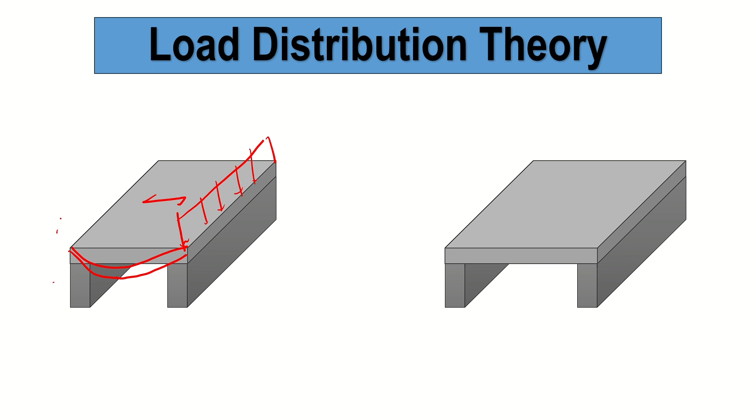So, how does the loading distribute from the slab towards the beam? Madali lang. Kapag one-way distribution, lahat ng loading mo mapupunta sa long span. Ibig sabihin, magkakaroon ka ng uniformly distributed load sa long span. So ano napupunta sa short span? Essentially, wala. Does it mean that we don't have any loading in the short span? It doesn't mean that we don't have. Kasi, all of the materials have self-weight. So may loading pa din yun, yung self-weight niya. But essentially, the superimposed load will be transferred to the long span beams.

Okay? So again this is for one-way slab or one-way distribution. How about for two-way slab? For two-way slab, ganito yung itsura niya usually sa framing plan. So kapag ganyan yung symbol, it transfers its loading to the long span as well as the short span. So magkakaroon ng loading yung both. So meron tayong trapezoidal loading sa long span, while in the short span, we will be having triangular loading. Ganun din sa kabila, hindi ko na isusulat kasi magulo.

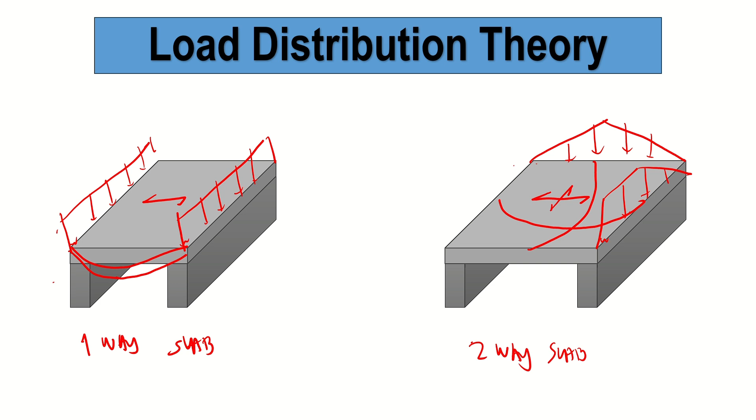So para mas malinaw on how do we determine one-way or two-way slab, ito yung scenario. For example, we have a framing system. This is a column, itong dark shaded, tapos yung mga naka-broken line, that is a girder, tapos that is a beam. So if L over S is greater than 2, that is one-way slab. Now, if L over S is less than or equal to 2, that is two-way slab. Ano nga ba yung L?

Ano nga ba yung S? So basically, L represents the long span of a slab panel. So ano ba yung slab panel na pinag-uusapan natin? Yung slab panel is the one that is bounded by a beam. So yun yung considered natin na slab panel.

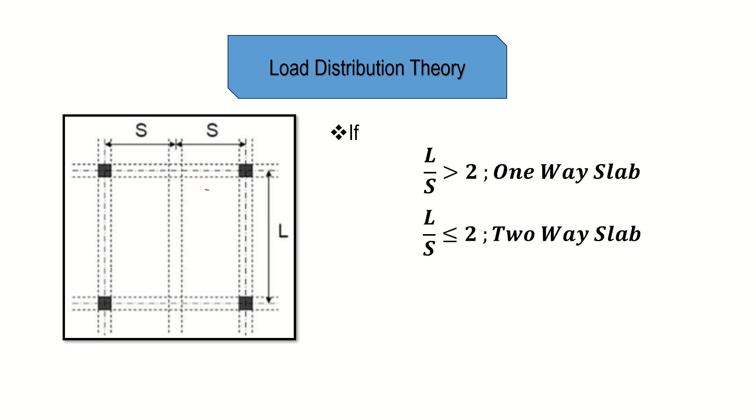So for example, here in our framing system, as you can see, syempre alam natin na yung slab sinusuportahan siya ng beams. So ngayon, ito ay considered as one slab panel kasi may beam ka sa gitna eh. O yan. Yan ay considered as one slab panel. If that is one slab panel, ang sabi natin yung L tsaka S natin naka-based sa slab panel. So therefore, our long span natin will be right here and short span natin will be right here.

So hindi po yun distance ng column to column. Some other students nalilito eh. Ang ginagawa nilang distance ng long span tsaka short span, column to column. That's not the case. Again, we will base our L over S, yung L natin tsaka S natin, based on the slab panel. So if this is the case, our slab panel is right here, the long, and then ito ay yung ating short span.

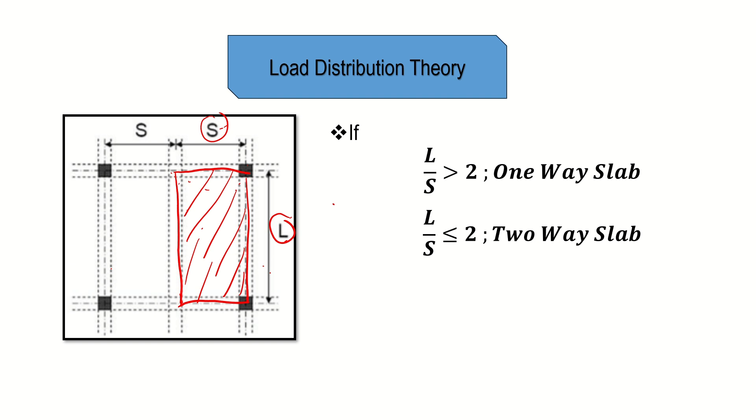Okay? Now, again, if L over S is greater than 2, that's one-way slab. Kapag less than or equal to 2, that's two-way slab. In some other books, pinagbabaliktad nila, parang S over L. Kapag S over L is less than 0.5, that's one-way slab. Kapag greater than 0.5, that's two-way slab. So, ganun lang. But for me, stick tayo dito. L over S greater than 2, one-way slab. L over S less than 2, two-way slab.

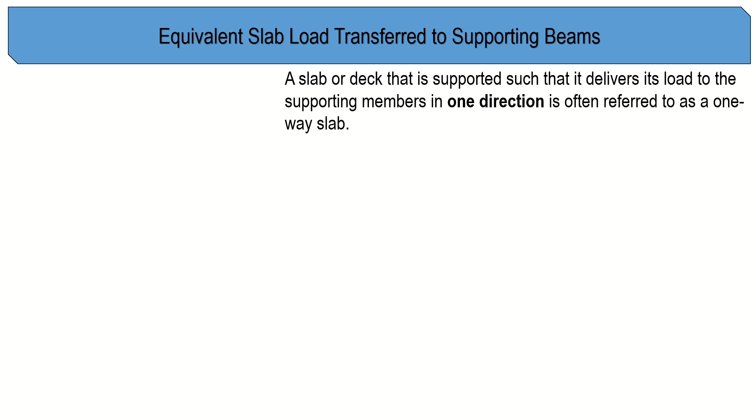O, ngayon, let's start with our proper lecture. So, ito yung equivalent slab load transferred to supporting beams. So, sabi dito, a deck or a slab that is supported such that it delivers its load to the supporting members in one direction is often referred to as one-way slab. Again, meron tayong ganitong symbol. Kapag nakakita kayo ng ganyang symbol, tina-transfer niya yung loading niya, all of the superimposed loading, to the beam kung saan nandun yung long span. So, ang ating long span dito is the beam CD. Ngayon, ang ating short span is beam AC.

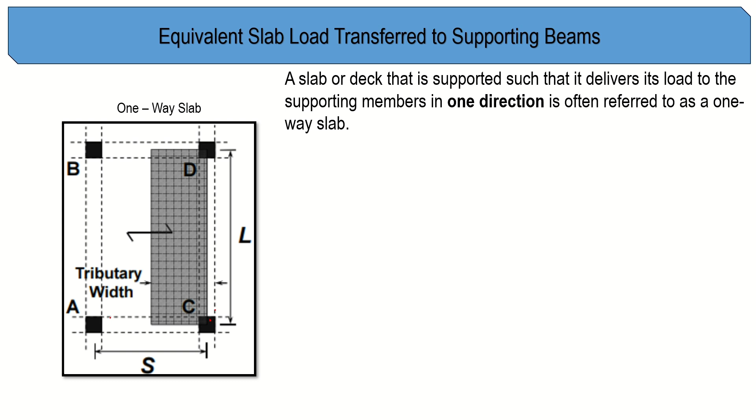But how do we distribute it? Kung nakita nyo kanina sa figure na dinrawing ko, siya ay uniformly distributed loading. When we say uniformly distributed load, rectangular loading po. Ayan, just like this one, what you can see in your screen. So ngayon, how do we determine the W? Ito, yung W na yan, yung magnitude ng loading nyo. Madali lang. So yung Q mo, coming from the code, yan yung mga loading sa NSCP or ASCE na naka-kPa. Just multiply it by the tributary width.

Ano ba yung tributary width? Tributary width is just half of the slab short span. Yung short span ng slab. So in our case, since edge slab panel to, ang tributary width lang natin is kalahati lang ng S. Kapag middle slab panel ito, dalawang kalahati, so magiging S. But in our case, that is S over 2. So again, Q coming from the code multiplied by tributary width. That is just how we get the W.

So how about in the beam along short span? So sabi natin, walang loading. But again, this is not true because all of the beams have self-weight in them. So hindi po yan magkakaroon ng no loading. This is just a representation for the loading considering superimposed loads. Hindi kasama yung self-weight when we say superimposed.

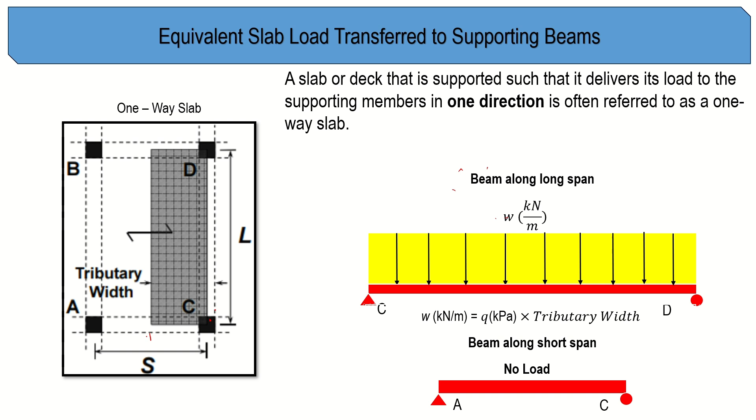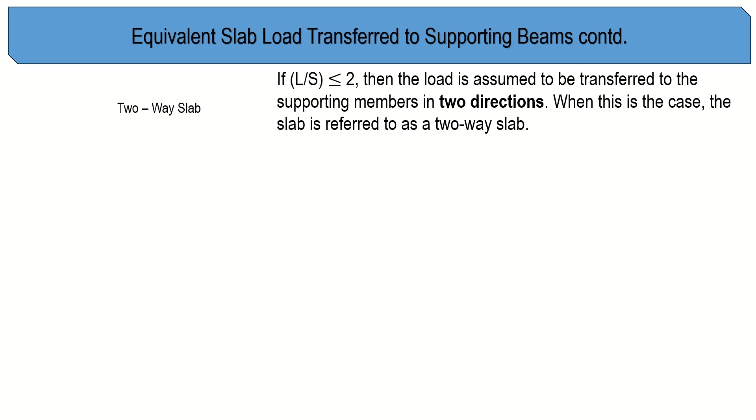Okay? So ngayon, paano naman kapag two-way slab? So if L over S is less than or equal to 2, then the load is assumed to be transferred to the supporting members in two directions. When this is the case, the slab is referred to as two-way slab. So ngayon, hindi na tayo rectangular. Magkakaroon na tayo ng trapezoidal tsaka triangular. Ganun pa din, how do you determine W? Yung W po pa din is Q coming from the code multiplied by tributary width. So ngayon, in our case, ganun pa din yung tributary width natin is just S over 2 kasi this is an edge span slab.

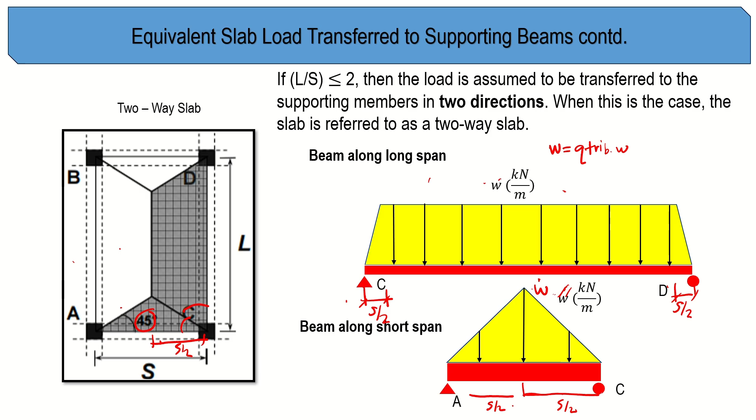So sabi dito, the floor system used in a school classroom consists of 100 mm reinforced stone concrete slab. Set A is 3 meters, B is equal to 9 meters. Determine the maximum shear and maximum moment of joist BF and side girder ABCDE. Disregard the self-weight of all of the members. So this is important, no?

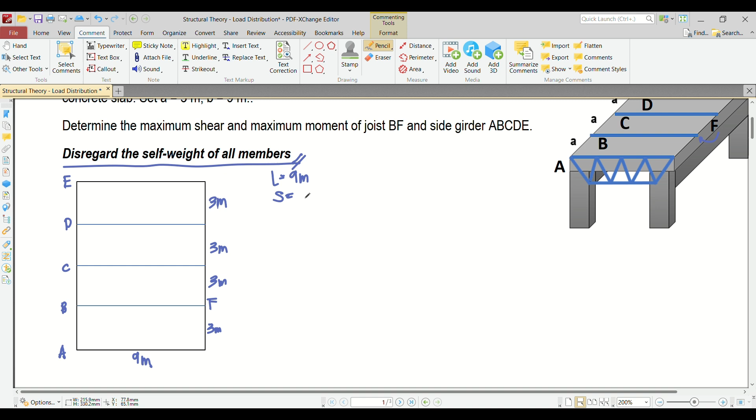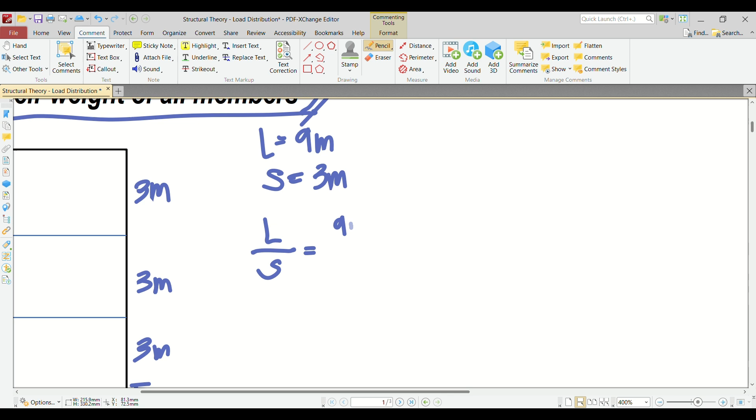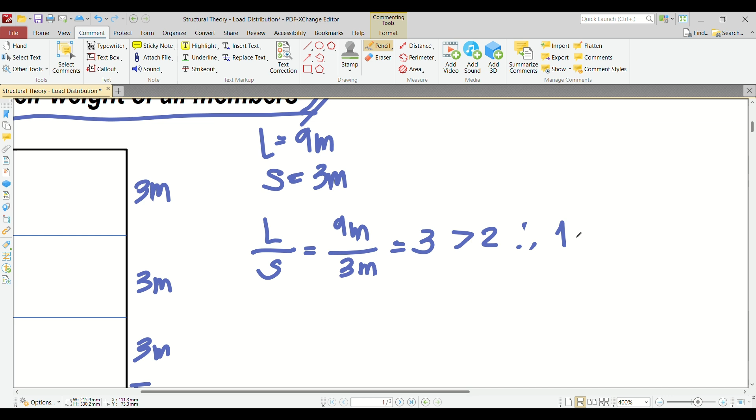So if this is one slab panel, our long span will be represented by 9. Ang short span natin will be represented by 3 meters. So if that's the case, divide mo lang yung long span over short span. So that would be 9 meters over 3 meters. So this is 3. Definitely that is greater than 2. So therefore, the distribution here is one-way. One-way distribution, or should we call this one-way slab.

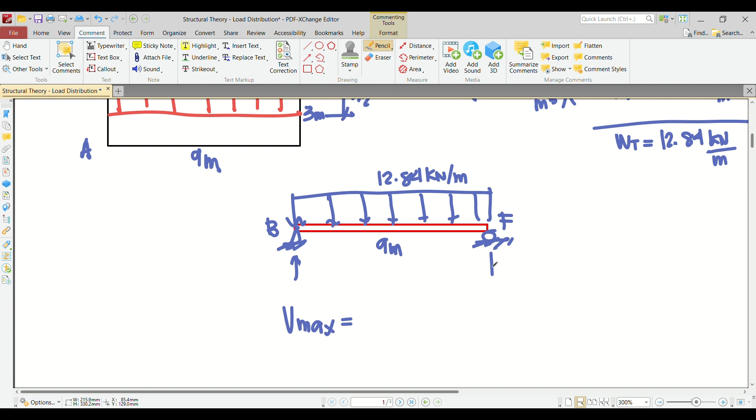So, R is WL over 2. So, ngayon, anong value niyan? So, burahin ko muna ito. So, yung R natin, by the way, bakit nga ba WL over 2? So, that is just the total loading divided by 2. Paano natin makukuha yung total loading? So, uniform load times the distance para maging kilonewton, divide mo ng 2 para makuha mo yung reaction. Bakit ganon? Kasi symmetric yung loading, symmetric yung beam. So, therefore, we can get the reaction in the edge using that formula.

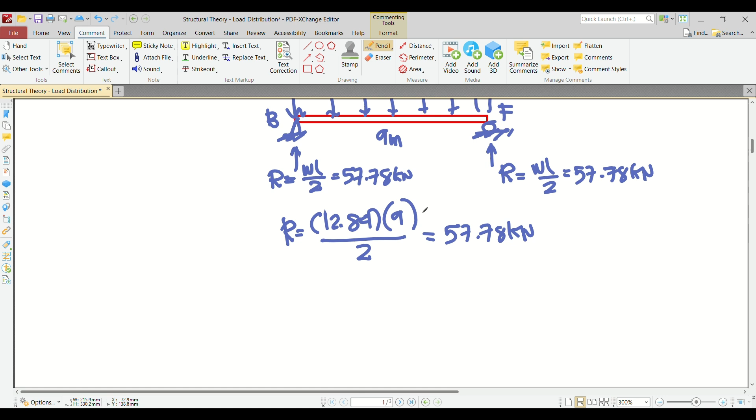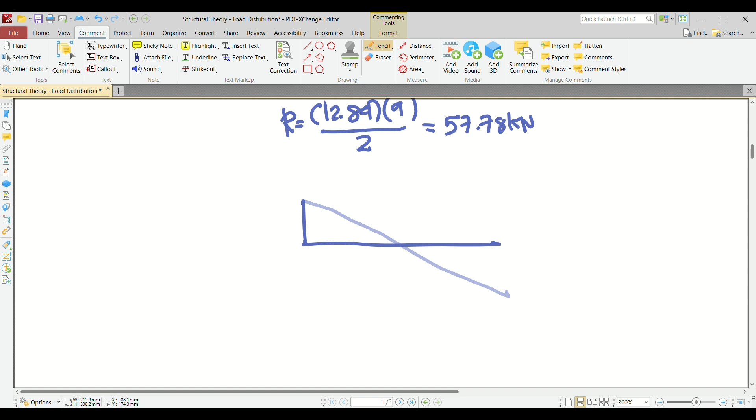Okay, so after that, hopefully you do know already the appearance of the shear diagram and the moment diagram of a simply supported beam subjected to uniform loading all throughout. So, para recall ko lang, no? So, yung itsura ng shear diagram niyan is just like this. Di straight. Ayusin ko lang. So, ganyan yung itsura, yung shear diagram, no? While the moment diagram is like this.

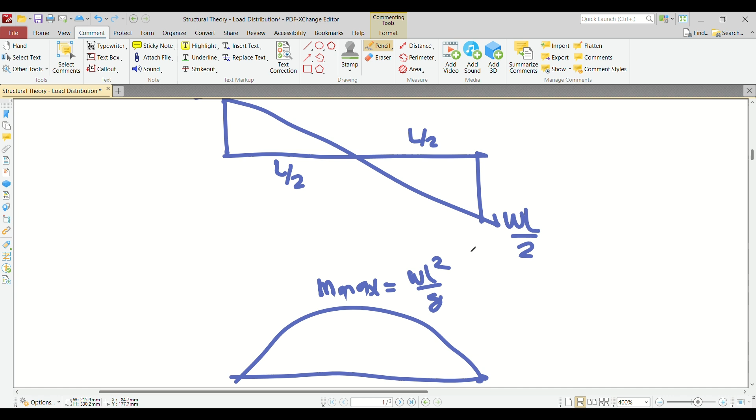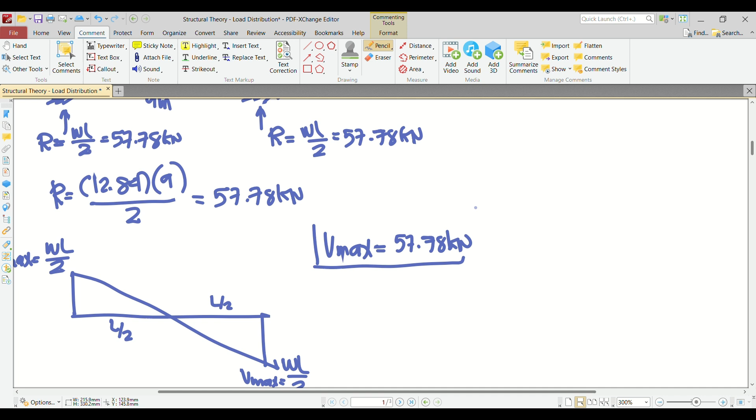So, ibig sabihin pala, ang value ng maximum shear natin is just equivalent to 57.78 kilonewton. So, that is already our answer. So, how about the value of our moment? So, again, the formula is WL squared over 8 or just the area of this shear diagram. No? So, pag kinuha mo yung area niyan, ito lang makukuha mo.

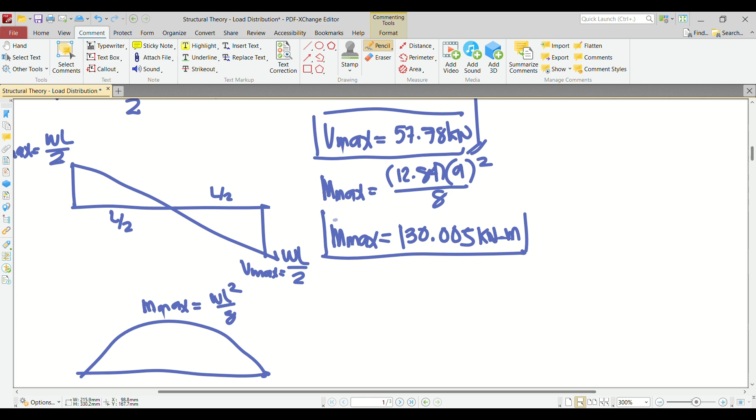So, ang nakuha ko is 130.005. Tama ba? Oo, tama. 130.005 kilonewton meter. So, therefore, this is our answer. Okay? So, that is our answer for the first statement.

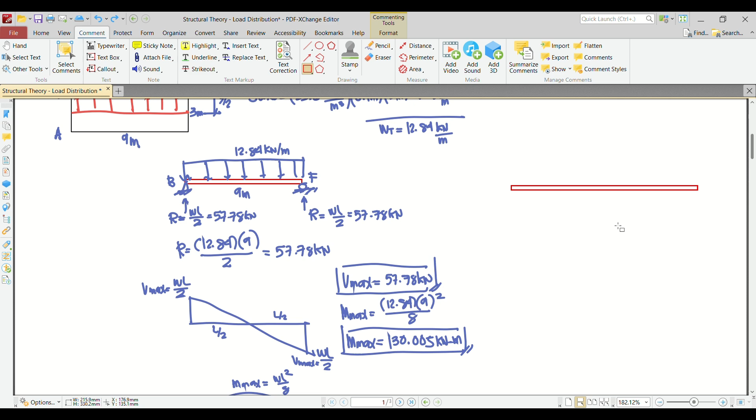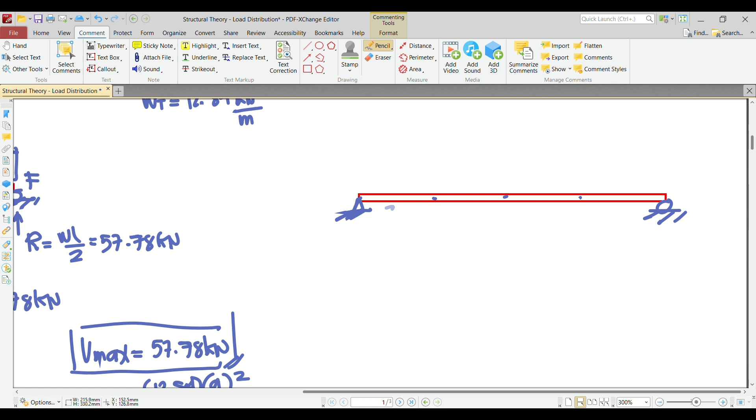So, for the second statement, dun naman tayo sa side girder ABCDE. So, ngayon, i-drawing ko lang muna. Siguro dito na lang. Medyo abaan natin, no? Ay, sorry. So, ganun pa din. Gawin nating simply supported para mas madali yung analysis. And based on the figure, it looks like a simply supported beam. Ayan, hinati ko na. So, this is 3 meters. 3 meters. 3 meters. And then, another 3 meters.

So, ngayon, take a look at this figure. So, as you can see, the tributary width for beam BF is just like this beam. Oh, parehas lang sila ng tributary width. Itong beam na to is parehas dito, parehas dito. So, ngayon, yung mga interior joist natin is pare-parehas lang ng tributary width. So therefore, pare-parehas lang sila ng uniform loading. And therefore, pare-parehas lang siya ng reaction.

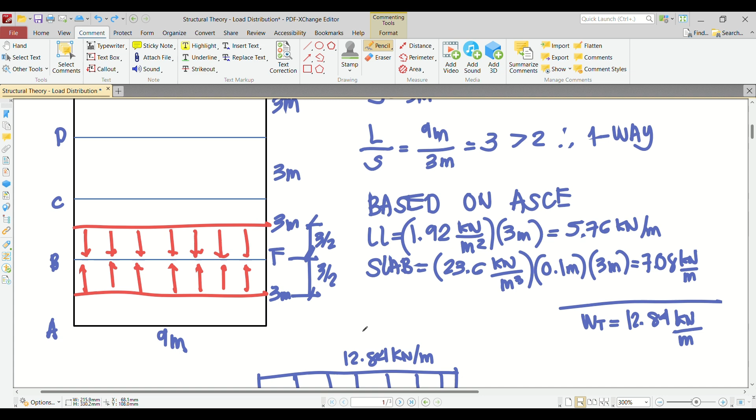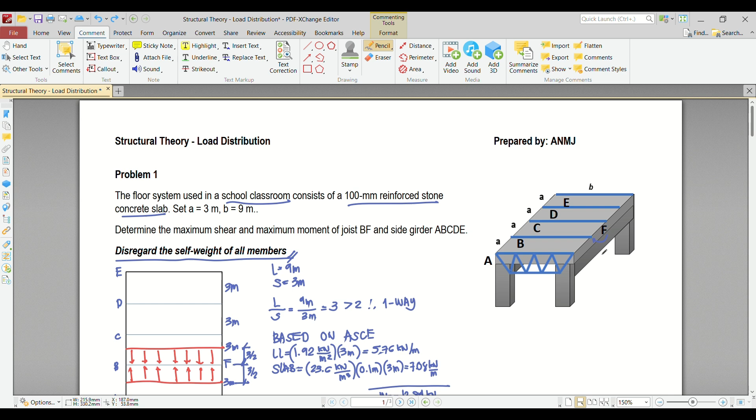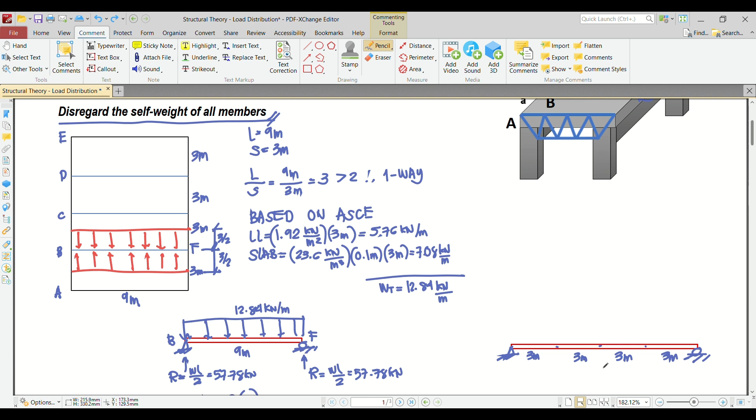And based on the figure alone, we all know that the beam or the joist is connected to the side girder. Connected po yan ha. So ibig sabihin, binubuhat siya. Siyempre, sino magbubuhat yan? Wala namang column dyan. Ibig sabihin, binubuhat ito netong side girder na to. So kapag binubuhat yan, whatever the reaction right here should be reflected to side girder ABCDE. So ngayon, ito yung side girder ABCDE natin. So A, B, C, D, E.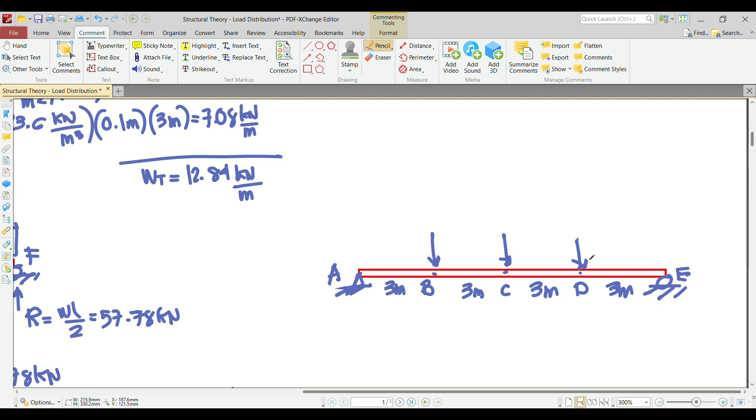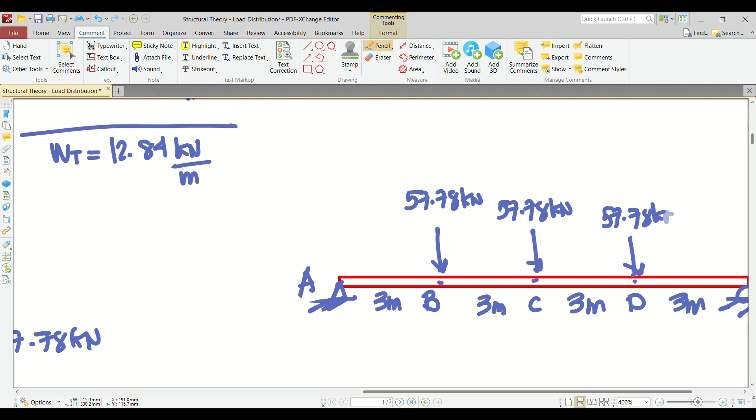Dahil binubuhat niya si joist BF, so dapat meron kang concentrated loading dito. Ano yung value niyan? That is the reaction of BF. Well, meron ka din dito of course kasi binubuhat din yan. So ano ba yung reaction ni BF? So that is 57.78. So therefore, we have 57.78 here. Sorry, ayusin ko lang. Ito, 57.78. So again, this is based on the reaction provided by the joist connected to the side girder. So therefore, nagkakaroon sila ng mga weight, in the form of concentrated loading, of course.

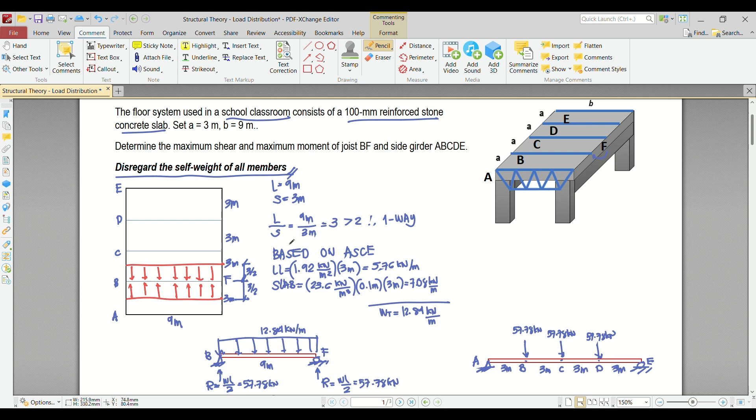Ngayon, meron ba tayong uniform loading dito? Wala po. Bakit wala po? Kasi we all know that the distribution is one way. Ang sabi natin kapag one way, tapos disregarding the self-weight, we don't have any loading along short direction. So in this slab panel, ang short direction natin is ito. So therefore, wala tayong i-consider na uniformly distributed loading.

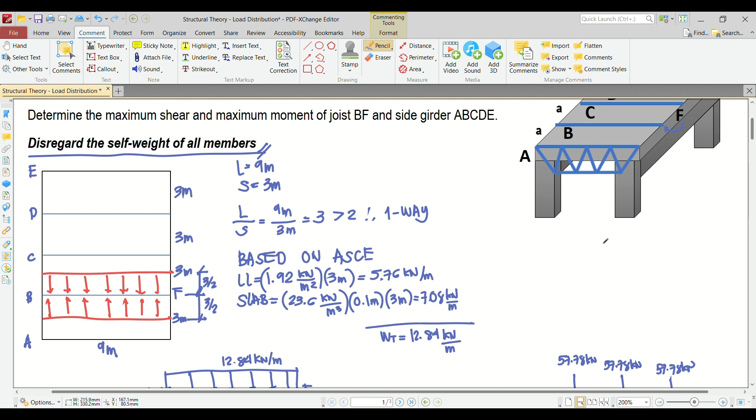Ngayon, meron pang isang scenario. So in some other books, nilalagay nila yung reaction ng joist na to. And some other books, hindi naman. But you can use either of the two. Pwede mong ilagay, pwedeng hindi, if you are just getting the value for the maximum shear and maximum moment. Actually, maximum moment lang kasi sa shear magkakaroon ng variation.

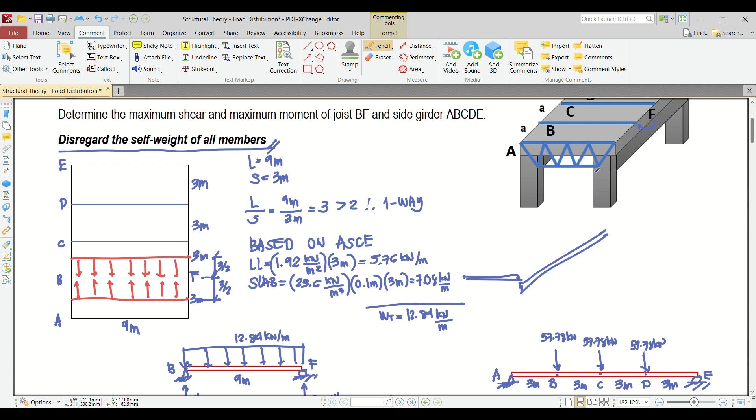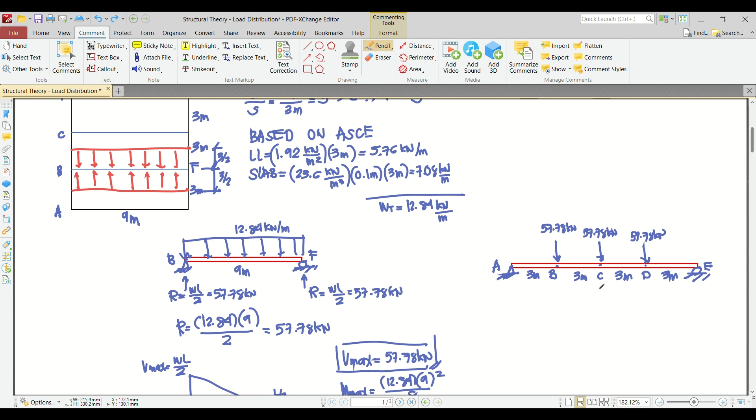Kasi nga naman, if you take a look at this framing plan, ito kasi parang medyo malabo. Pero kung ganito yung itsura ng framing plan mo, in 3D, kung nandito nakakonect yung joist, mabubuhat pa rin siya ng side girder ABCDE. So, in our case, siguro hindi na lang natin siya isasama kasi parang nabubuhat na siya ng column. But the value for the maximum moment remains the same because magma-minus lang naman yung dalawa sa pag-get mo ng reaction. So, in our case, hindi muna natin isasama but you can incorporate it.

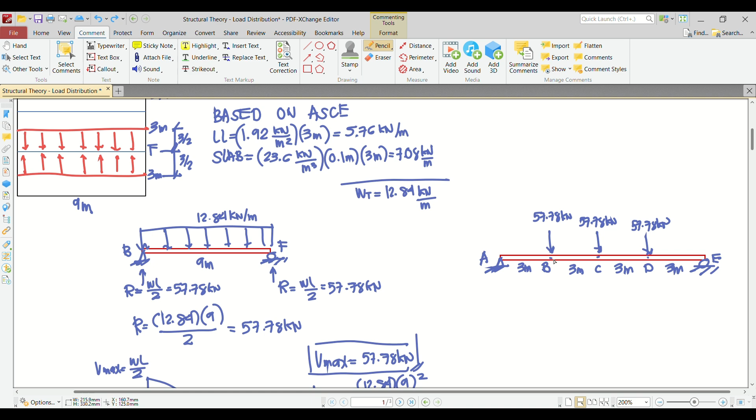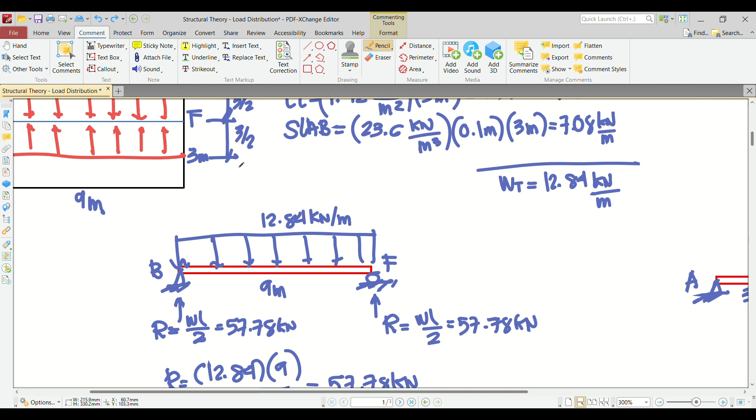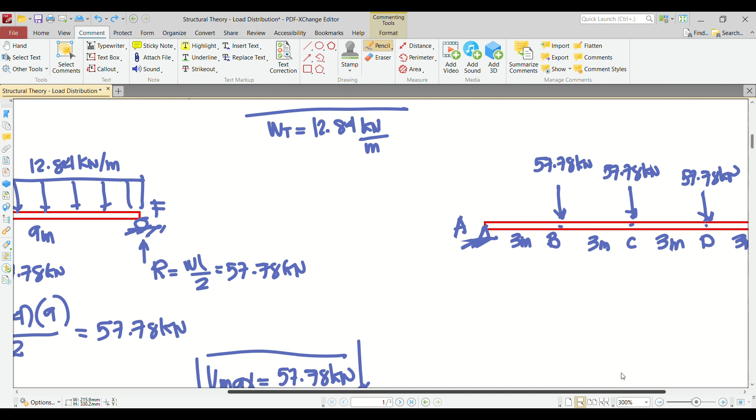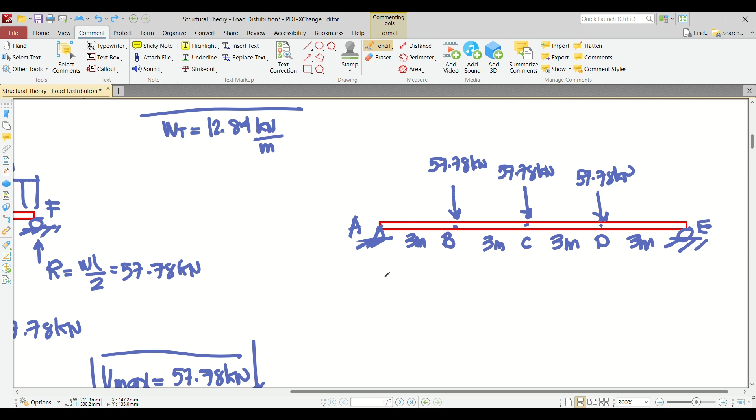Anong gagawin mo? Kunyari, isasama natin. Kakalahatiin mo lang to. Bakit? Kasi yung tributary width niya is kalahati na lang. So syempre ito magiging 1.5. So eventually, sa pagkuha mo ng reaction, magiging kalahati. It depends on the problem and on the representation of the figure. Pag sa tingin mo, binubuhat ng side girder yung joist, incorporate mo yung loading. Kapag hindi, hindi. Kapag multiple choice, probably isa lang yun nandun sa answer para hindi magkalituhan. So in our case, di muna natin isasali. Ganun pa din yung pinapahanap sa atin, Vmax saka moment max.

So, ang gagawin natin, first is we need to determine the reaction. So, in our case, it's just the same. Symmetric yung beam, symmetric din yung loading. So, to get the reaction is just the total loading divided by 2. So, that is just equal to 57.78 times 3, divide mo sa 2. So, ilan kaya yan?

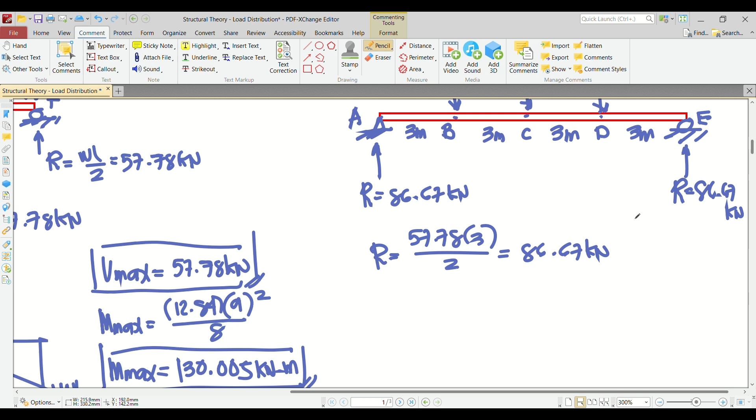86.67, so this one is 86.67 kilonewton. So this is 86.67 kilonewton. So now, if that's 86.67, let me give a tip: if you have a simply supported beam, remember...

Simply supported means you have a pin at one end and a roller at the other end. If that's the case, and you have loading at the center, whatever the case, as long as it's symmetric loading, the maximum shear will always be the value of the reaction. To repeat: if you have a simply supported beam with a pin at one end and a roller at the other, and your loading is symmetric, your value for the maximum shear is just equivalent to the value of your reaction.

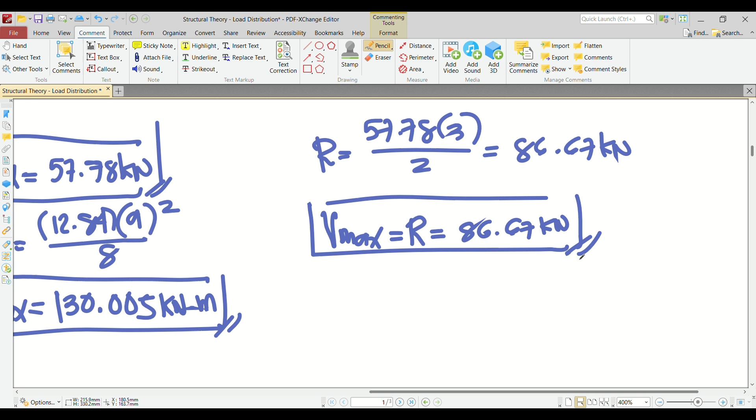Now in our case, since it fits our criteria—symmetric beam, symmetric loading—therefore the value for the maximum shear in our case is 86.67 kilonewton. So this is now our answer for the reaction or the shear, maximum shear, considering side girder A, B, C, D, E. Now, how about the moment?

The moment is easy. We all know that the maximum moment happens when the shear is 0. So in our case, we can project that our maximum moment or zero shear will happen at the center. Look: 86.67 minus 57.78, it still hasn't flipped sign.

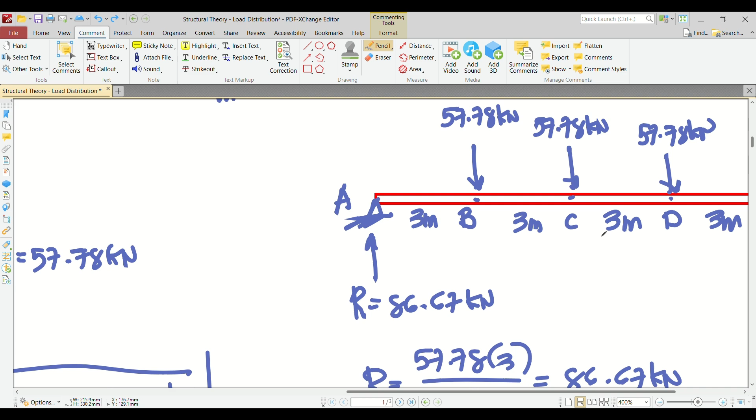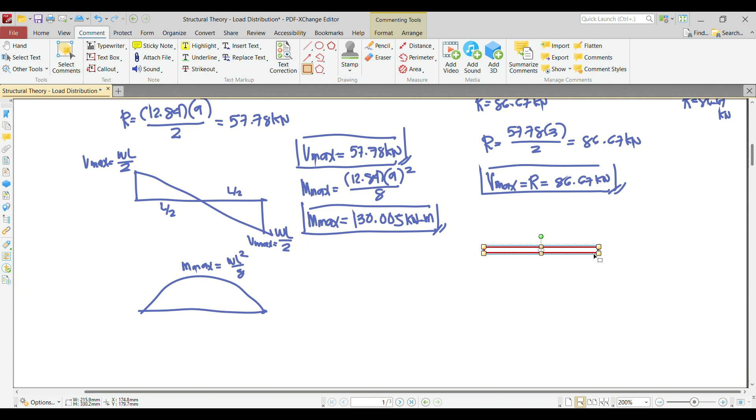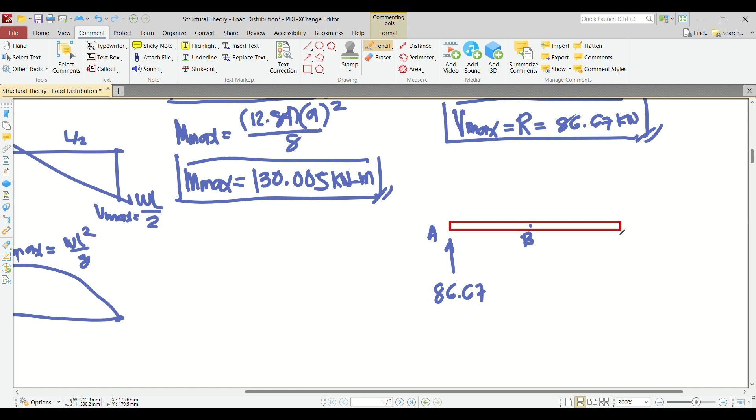Let's place the reaction here: 86.67, and this is point A, then somewhere here is point B, this is point C. Now we have a concentrated loading of 57.78 here. This is 3 meters, and this is also 3 meters.

Now when you cut it, wait, let me erase this—this is point C. When you cut it and consider the left side, the direction of your moment should be counterclockwise. That's it, M max, or you can also call it MC. Doesn't matter.

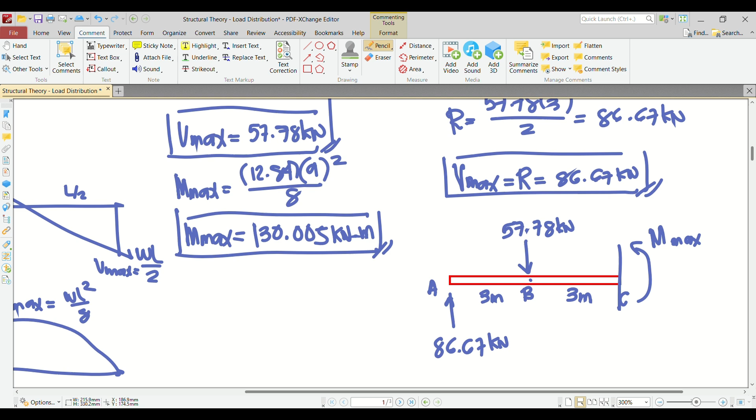So how do you get that? You take the moment there. You might ask, sir, why didn't you include the 57.78 located at point C? Because it doesn't have any distance. So it doesn't reflect our value for the maximum moment if it doesn't have perpendicular distance from where I'm taking the moment, and I will take my moment at point C—so it has no bearing.

So what I do here, you can take the moment, summation of moment at point C equals 0, that's one way. But for me, my method is different. My method: if the direction is opposite, it's positive; if same direction, negative. So in our case, to determine the maximum moment, we still take the moment, but it's easier this way.

So what's the opposite direction? This 86.67—that's opposite direction from point C, for my moment, M max. So that is 86.67 multiplied by the perpendicular distance, which is 6. That is positive since it's opposite direction. Because if you're here, it rotates clockwise, this one counterclockwise—so opposite direction, positive.

And then minus, because this one is the same direction as my M max. So that is 57.78 multiplied by the distance from point C, which is 3. So what value do we get for M max? What I get is 346.68 kilonewton-meter. So this is now your answer for the maximum moment for side girder ABCDE.

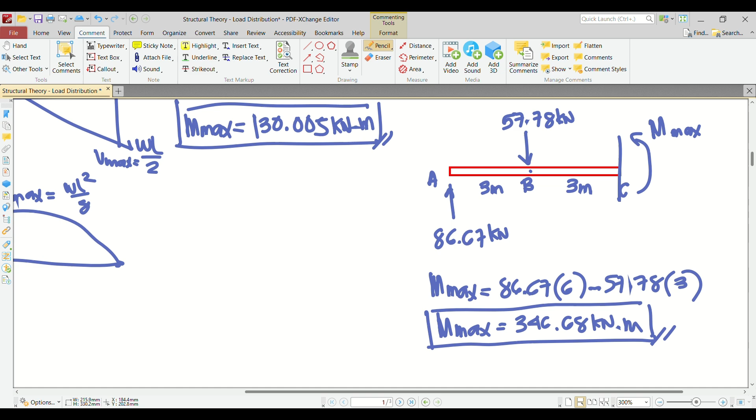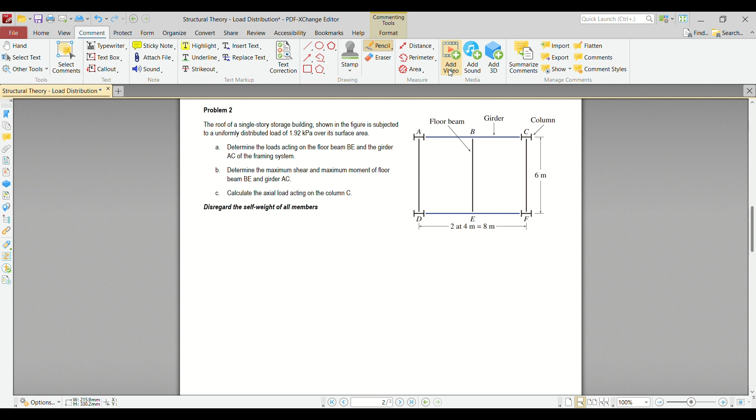Okay, hopefully you do understand. Don't worry, we have another problem for two-way slab—that's for another video. Thank you for watching the first part of load distribution. See you in the next video.